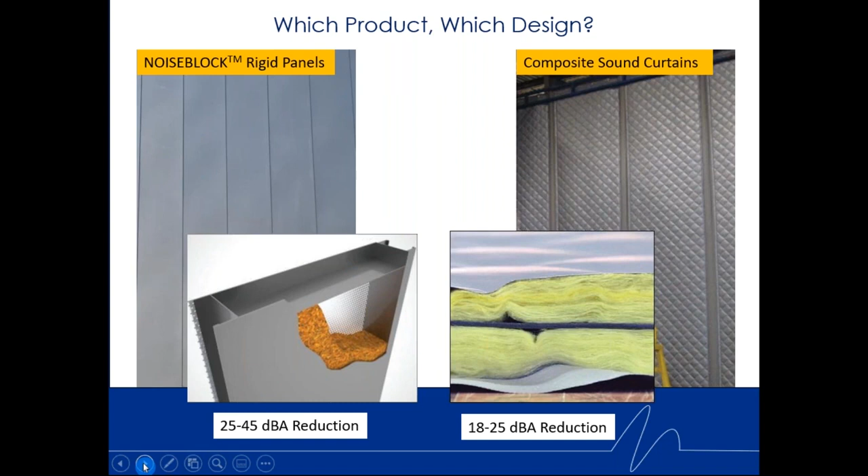And if you need a little less, 18 to 25 dBA reduction, you can go with a more cost-effective or lower cost product, still a very durable product, but you don't really need this heavy-duty massive product when you're controlling noise around a piece of equipment, something like that. So composite just means that this acoustic product is going to both absorb as well as block sound all in one product. It doesn't just block sound and it doesn't just absorb sound.

So composite curtains are basically MLV, or limp mass, or mass loaded vinyl, or limp mass barrier, combined with a quilted fiberglass absorber, providing both sound blocking and sound absorption. So this is a cut view before it's actually finished off and sewn as a finished panel, but that's what we're looking for, composite, anything with sound blocking and sound absorption.

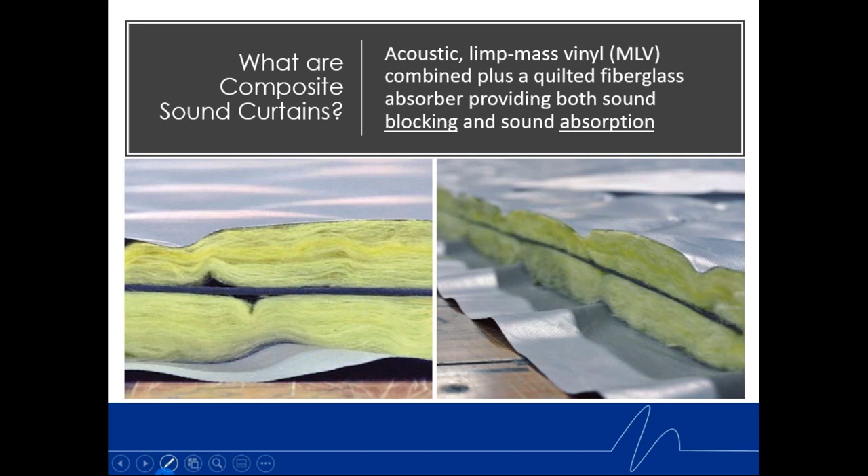In the process of our curtain manufacturing, we have factory cut to length support systems. So we're going to have different ways to support a sound enclosure made of curtains. We have quilting processes to quilt the product, and then we have sewing and factory cut penetration processes. So everything comes already sewn, fit to size, fit to your application for easy install. But that's really all that's involved in the manufacturing process.

If we look at our noise block rigid panels and our composite curtain performance, on the x-axis you have the center frequencies, 63 hertz through 8,000 hertz, and then the transmission loss in decibels, how many decibels per octave band it's going to block within a certain frequency. You can see the top line, sound transmission class value to the right. Sound transmission class value is dimensionless, and basically the higher the number, the better its ability to block sound.

So we can see that the steel panels, the rigid panels, which are about 5.5 pounds per square foot in weight, are quite massive, and they do quite a good job at controlling noise from 63 hertz all the way up to 8,000 hertz. Curtains are at a lower STC, so they don't block noise as well, but for many applications, it's all you need.

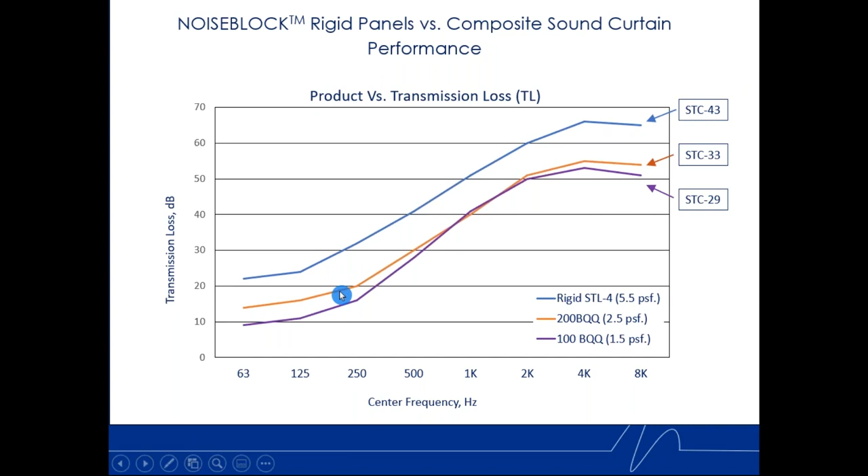That kind of compares the 3 products, rigid product at the top, and then our composite curtains on the next 2 curves. The two most common configurations of this product is what Kinetics would call our BQQ, or barrier sandwiched between two layers of quilt here on the left. So you have your quilted fiberglass, your mass loaded vinyl in the center. Gives you nice absorption on both sides of the product, and in between that, it gives you a massive mass loaded vinyl, which is going to block sound.

We also have a product called our RBQ, which is basically quilt on only one side and then our reinforced barrier on the other. And in this case, since the quilt is only on one side, your absorptive material is on one side, that's the side that would face your noise source, maybe your noisy compressor or something of that nature.

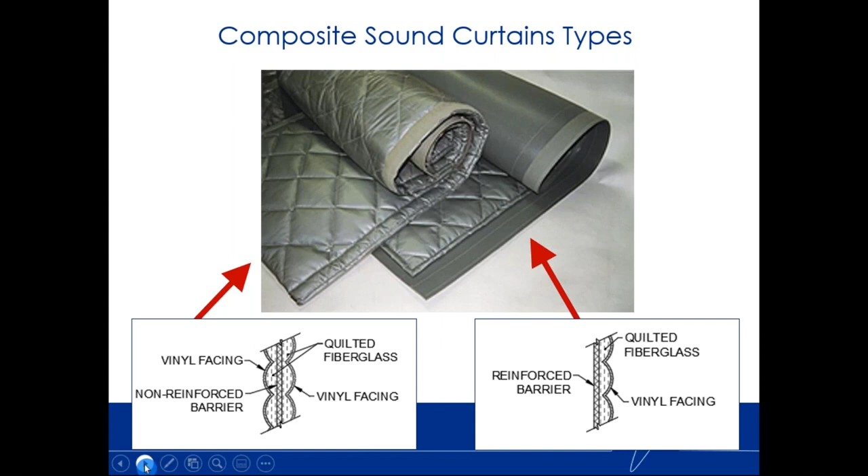Mechanism of performance, we just talked about that, is a composite curtain is going to offer sound absorption, and it's going to offer sound transmission loss or sound blocking. Now for sound absorption, although we use the same density of media, of fiberglass insulation, it comes in different thicknesses, 1, 2, or 4-inch nominal. And the reason I say 4-inch nominal is because it's 4-inch before you sew it, and then it gets compressed a little bit when you sew that. The mass loaded vinyl comes in either a 1 pound per square foot or 2 pound per square foot. So depending on your application, the greater the mass, the better it is to block sound.

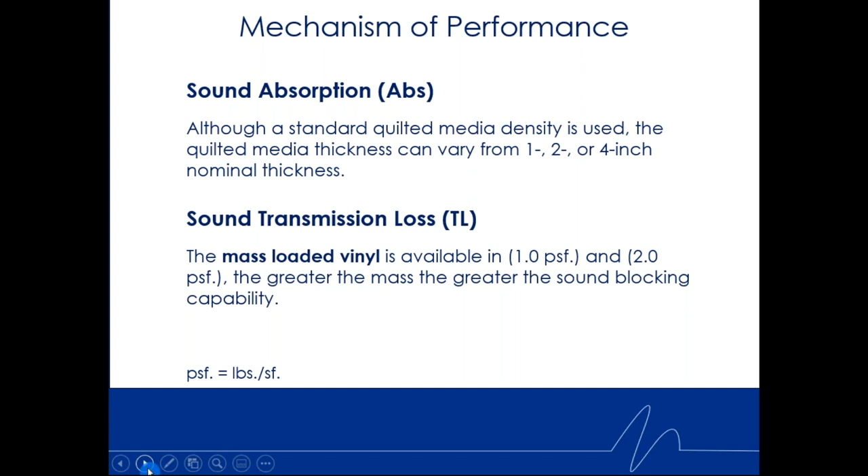All the products that we have for our composite curtains, and many of Kinetics products, are independently tested and backed by those tests. ASTM C423 for sound absorption, and then ASTM E90 for sound blocking. And so we have all that information, those test reports, and they're all done in a NVLAP accredited laboratory.

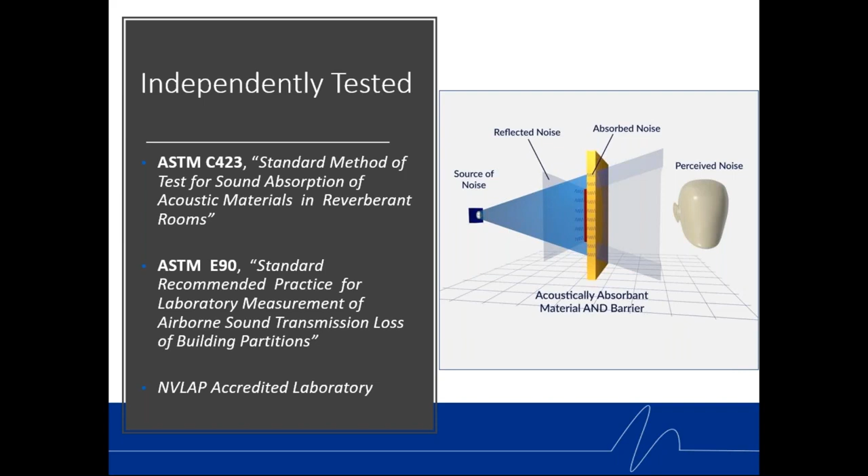There are various constructions of these, as we talked about. We have different thicknesses of quilt, and of course we publish all the NRC and the sound absorption data per frequency. And then also we have different levels of the composite for the transmission loss. So a 50 here you see is a 1/2 pound per square foot mass loaded vinyl. A 100 is a 1 pound per square foot vinyl, and then a 200 is a 2 pound per square foot mass loaded vinyl. And the Qs just mean there's either one layer of Q, or 2 Qs means it's sandwiched. And then we have all the data showing you the STC.

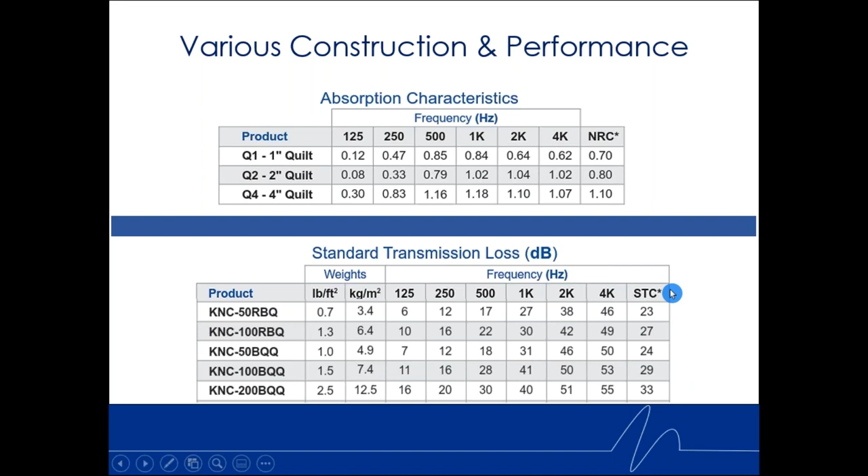So very quickly you can look at this. As an acoustical consultant or engineer, you can actually use the frequency data and determine which one is best for your application, or very quickly to zero in, you can use the STC level. The higher the STC level, the better the blocking capabilities.

Now, when you look at a composite curtain system, and what I mean by that is an enclosure, let's say 4 walls and a roof, they offer typical noise reductions of 18 to 25 dBA. Now, you may say, wow, 18 to 25 dBA, is that a lot? Well, just to let you know, a 10 dBA reduction is going to be perceived as sounding half as loud. So whether it's quiet enough to meet that OSHA standard and OSHA limit, a 10 dBA reduction is going to be what I call an ooh-ah. Wow, that really made a difference.

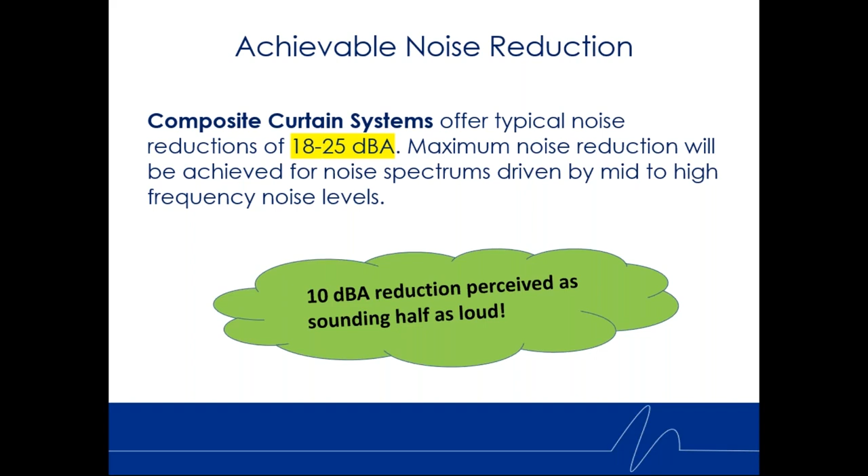All right. And so maximum noise reduction, though, with the composite curtains, what you're going to find out is they work extremely well with noise levels or spectrums that are predominantly 500 hertz and above. So more of the mid to high frequency noise that you may have if your process is producing that, as opposed to the low rumbling, these curtains work very, very well.

Features and benefits: it doesn't matter what your system will look like. The curtains are very forgiving. We can fit them in different contours. We can either close fit them or back them off of multiple walls and roof systems all in one. So they're very, very easy to work with. They're economical over the steel panels.

The steel panels are great because sometimes you need our noise block panels because you need a lot more noise control, maybe 35 dBA, not 25 dBA. Curtains allow for inherent easy maintenance. We'll talk about that as we go. Easy install. You really don't have to hire; if you have your own maintenance team, a lot of times they can put these up themselves.

All the projects have specific submittals, piece marked installation drawings. So everything's just like an erector set, just like a model. It's easy to put together. The product meets Class A fire rating. I think that's one of the most important.

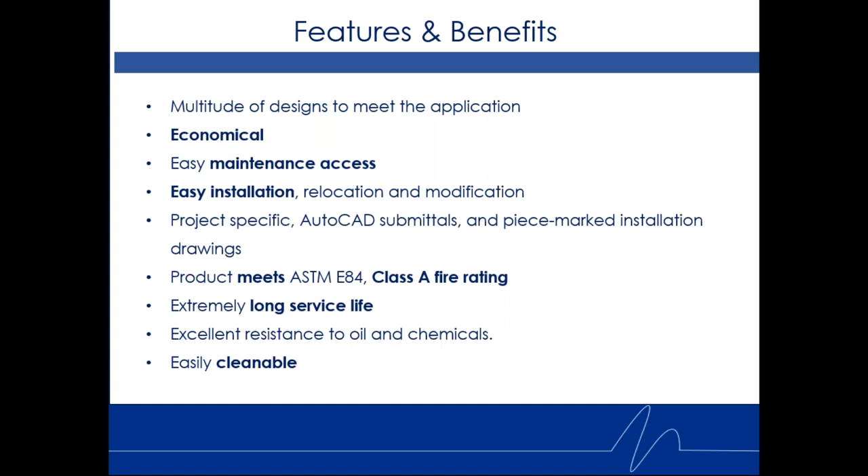So we may use it in a mechanical room of a commercial building. We may use it in a factory. We may use it in a central utility plant, wastewater treatment plant, all these different applications because mainly of the Class A fire rating. Extremely long service life, excellent resistance to chemicals, and easily cleaned. So those are just some benefits and features of the product.

Now, our systems: if you're making an enclosure with one of these around a piece of equipment or process, you can have different types of support systems. All the support systems that you're going to see over the next couple of slides are all bolt together. Everything's cut to size, very easy to install. So this one is a floor mounted frame system.

You're going to have some columns, you're going to have an overhead track, track mounts to the columns in these different corner and splice pieces. And then there's always trolleys. The curtains you're going to see are going to hang from these trolleys from factory installed grommets in the curtain panel.

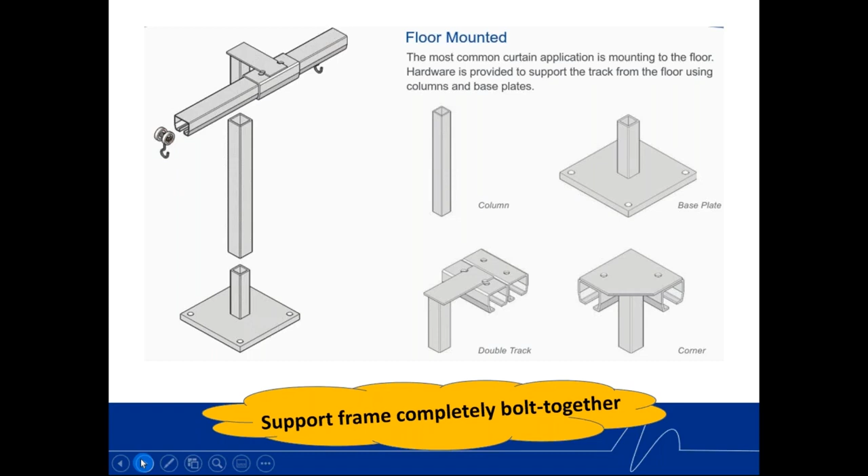Now, let's say you don't want columns, for either housekeeping or maybe they're trip hazards, or it just isn't the way you want to go. We can look at ceiling suspended track. So we don't have to use columns. We can use ceiling suspended track, hooking in some threaded rod, adjusting the level either flush with the ceiling or suspending it below the ceiling.

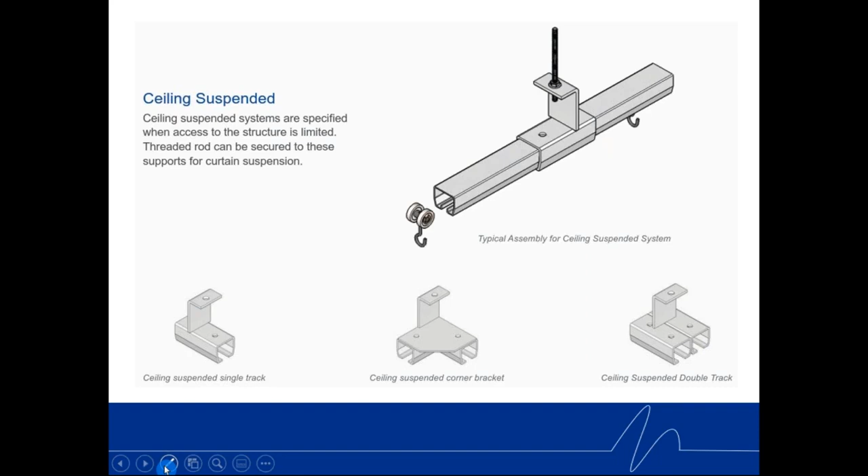We also do heavy duty. You're going to see an example as we go through of a system that's 16 feet tall, and Kinetics had to design and can design very robust support systems. Maybe instead of 1x1 or 2x2 tube steel columns, they're using 4x4 HSS steel and some heavy duty, might be 16, 20 foot tall.

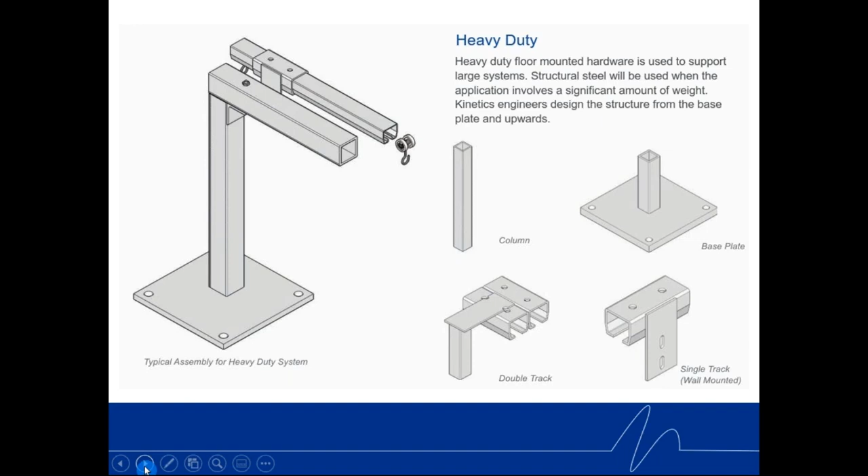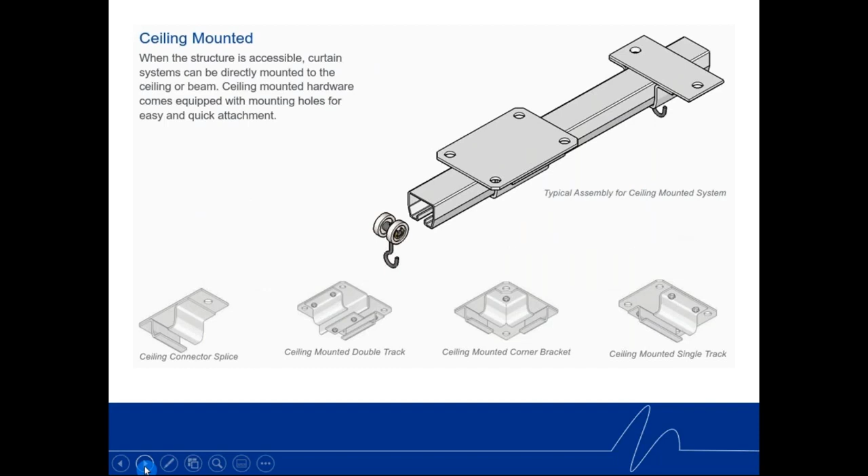And the nice thing at Kinetics, since we have our own structural team on staff, they can go ahead and design that for us. You can also wall mount our systems, and you can also ceiling mount overhead. So there's a lot of applications. If you don't want the columns for an enclosure or a couple of walls, whether it has a roof or not, you can mount it in all these different fashions.

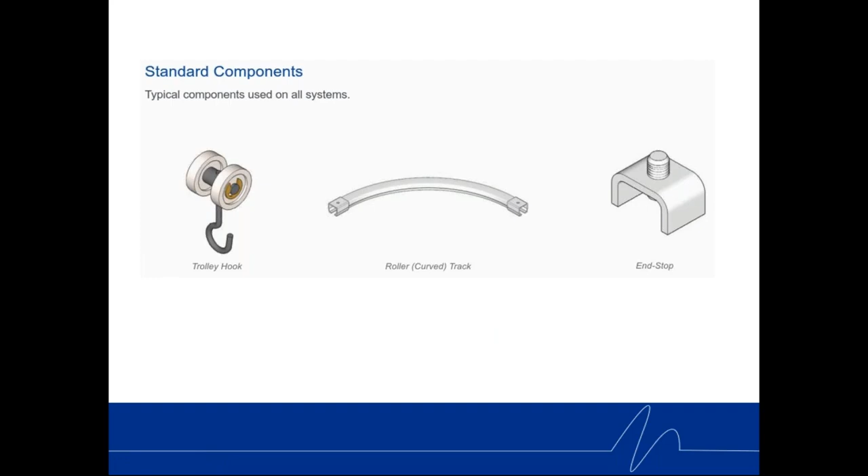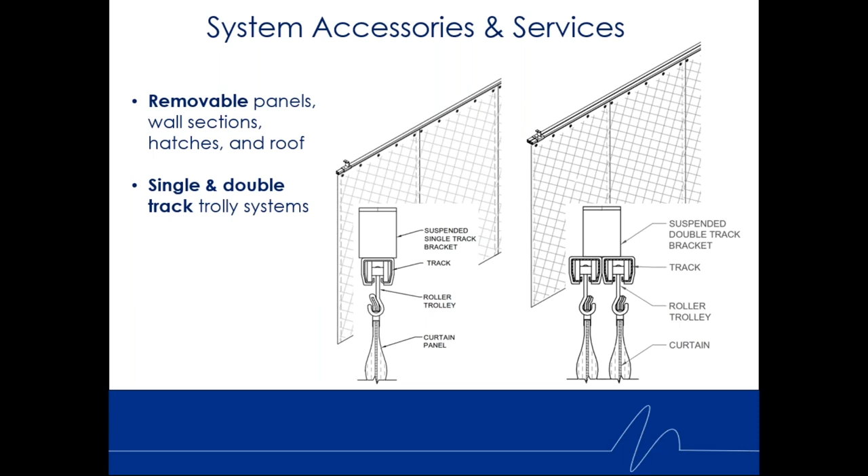So that's inherently easy to access. Also in these systems, when you start to enclose something, whether it was a rigid enclosure or these composite curtains, you still have to take into account some basic issues, lighting, access. You also have to look at the heat buildup within the enclosure.

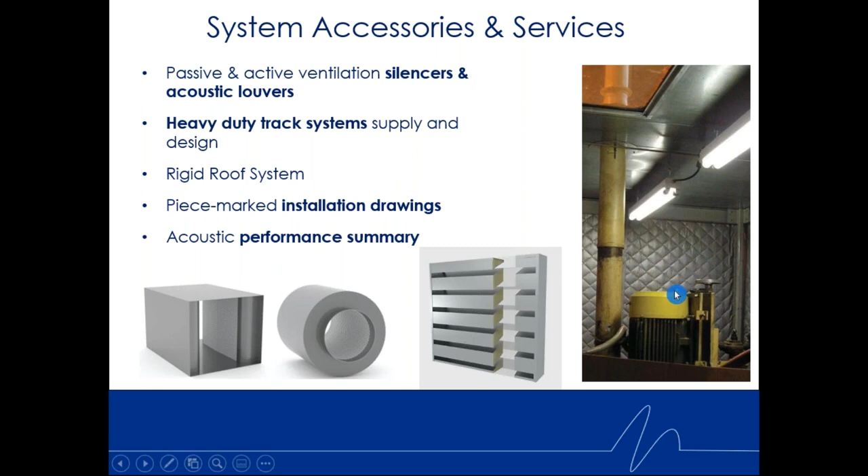You want to make sure it vents properly, whether you're going to need forced ventilation like a fan, an exhaust fan, or whether you can use passive ventilation. And so either way, Kinetics applies our silencers, acoustic louvers, and things like that to help in those cases. This one is really interesting because you actually have a rigid noise block roof on a curtain system, which makes it easy to hang internal lights and things like that.

Now, what I always believe in is a picture's worth 1,000 words. So our goal here in the next few slides is you may see something that's very applicable to an application or an interest you may have. So in this one, it's a curtain wall. We have a simple curtain wall here. There's actually a curtain in the background that you can't see that runs to the right. And it's making a little mechanical space. There's pumps and fans in here.

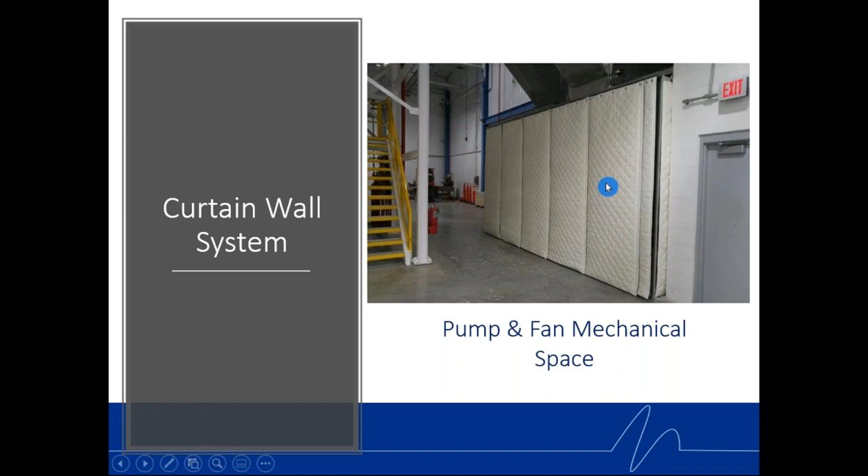And an interesting thing at this facility is you walk in this door and you go up these steps, and out of the blue, the pumps or the fan kicks on, and it kind of startles you. It's kind of unsafe, especially when you're getting on these stairs. So we make a mechanical room. This happens to be actually a 2 pound per square foot mass loaded vinyl sandwiched between 2 layers of quilt. So, you know, something very basic, very forgiving.

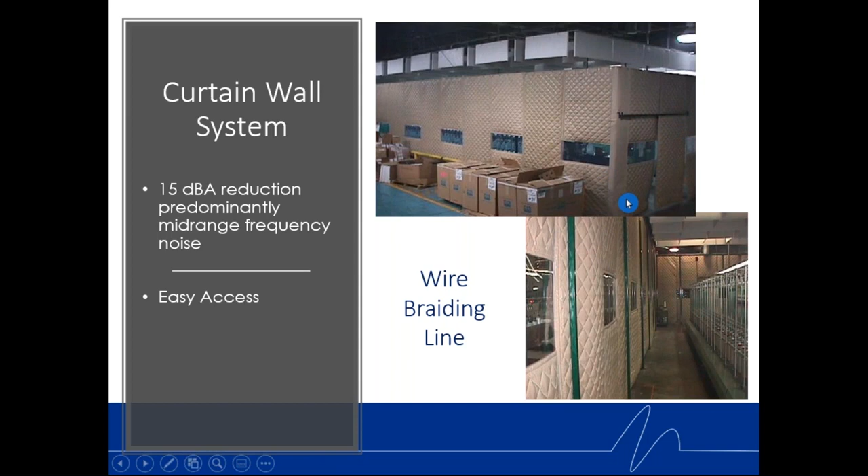Here's a system which is a wire braiding system, and it kind of shows you the inside and out. Well, they didn't want to enclose the top, so the system consists of 4 walls, viewports sewn in at the factory, double sliding access doors made of curtains, and then for the noise up and over at the top, we're actually using some of Kinetics KB803 baffles to control that flanking noise. So once again, another system, a lot of ways you can use a lot of standard product as applied to a non-standard application.

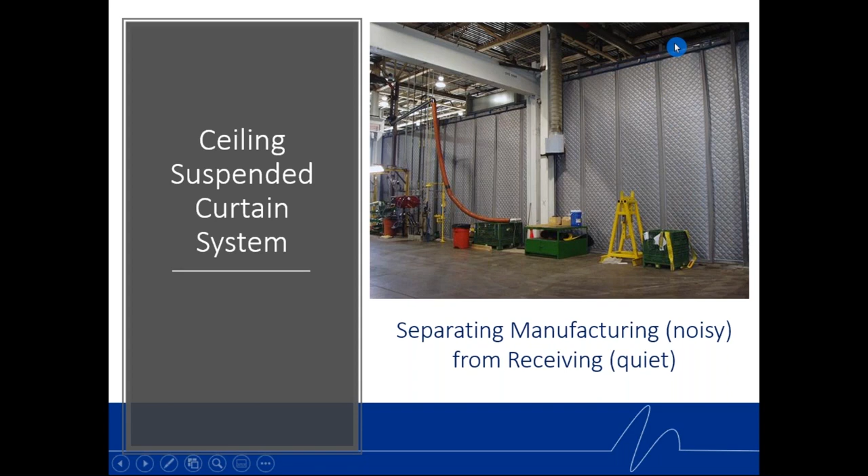This is another one separating two parts of a facility. In the background behind this wall is a very noisy area for manufacturing. A lot of it was in the 500 hertz band and above, but the left side here, the side we're on, was actually receiving a slightly quieter area. And so they were able to, with no columns, do a ceiling suspended system. And I think this was roughly 20 foot tall here on the tallest part to the right.

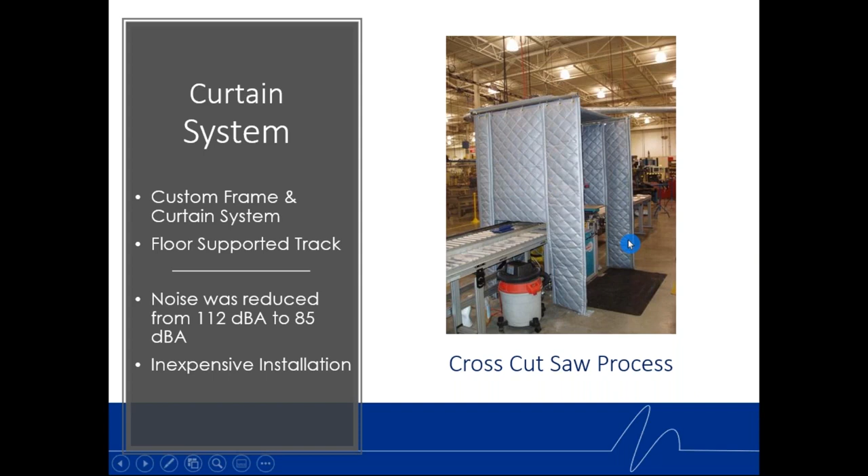Systems don't have to be very difficult either. This is a simple floor supported track system. They were at 112 dBA. It was a cross-cut saw cutting aluminum extrusions, and you know how loud that is, mostly mid to high frequency noise. So this was able to take it from 112 down to 85 dBA in the background of this photo. The only person that needed to wear hearing protection was the operator.

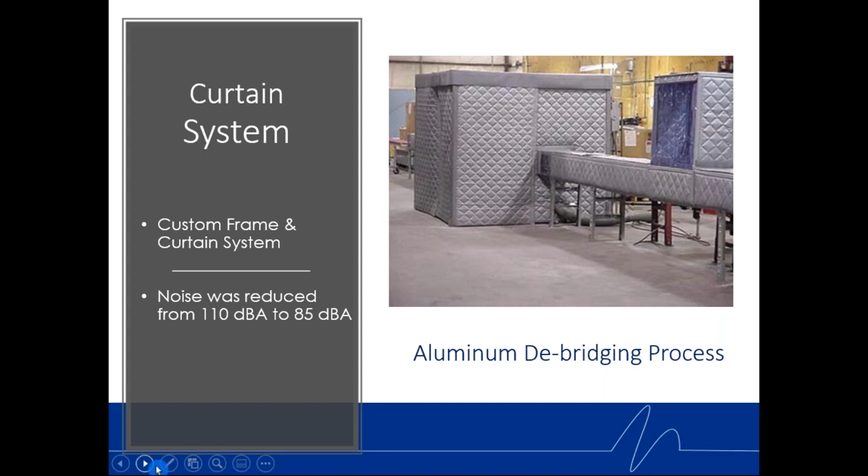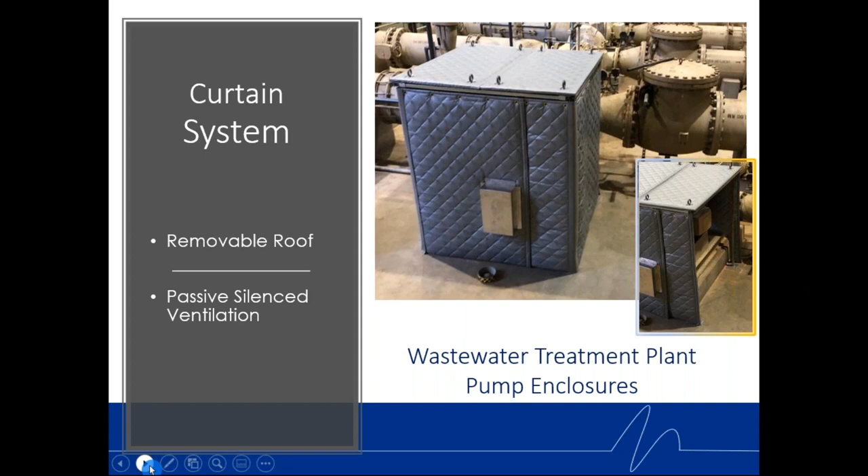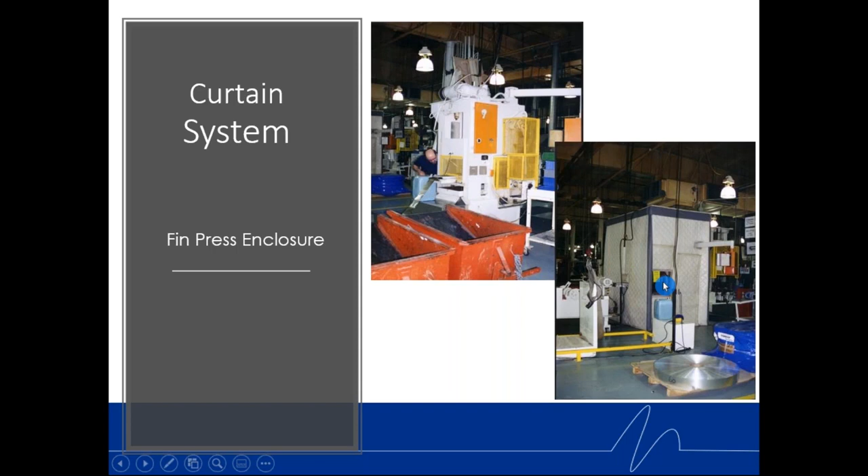Now, sometimes we actually have a client that may want to custom fit. So this is a fin press enclosure for heat exchanger fins, and they wanted to custom fit the enclosure, which I always like to kind of stand back from the enclosure a little bit to be the most cost effective. But this one was custom fit, and they had a number of these, and they actually worked out quite well with access and noise control.

So that's the nice thing with curtains, is they're very forgiving. It's easy to fit up. If you need to cut something, maybe there was something you couldn't line up to really make it in the shop, but you needed to field cut it, very easy to field cut and very easy to seal off.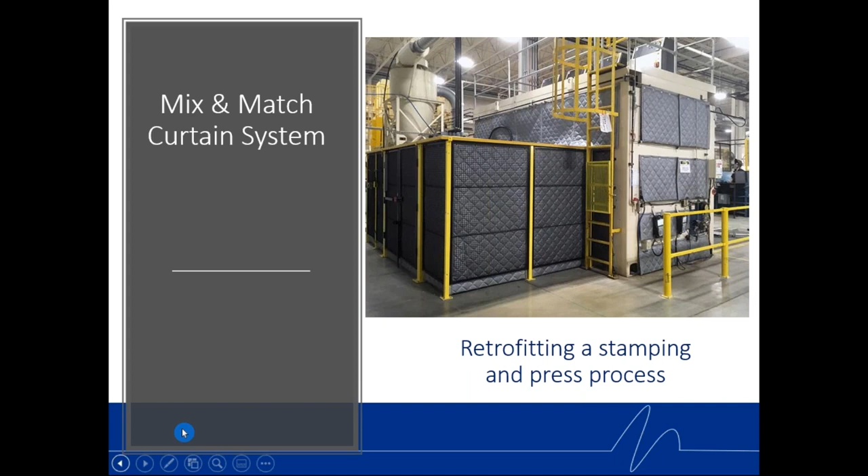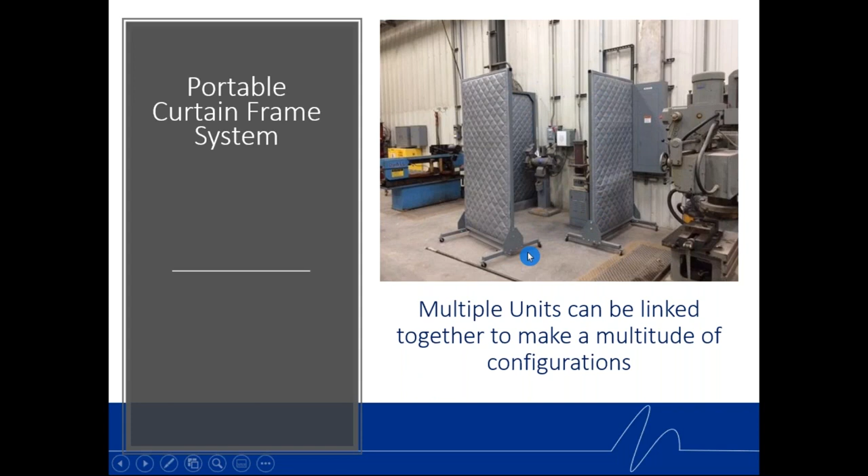Now, another one is multiple. You can have multiple of these portable curtain frames. Now you can get a half dozen or a dozen of these, and actually as they get closer to each other, you can use a mass loaded vinyl to cover this corner and connect each. So you can make this in many different shapes where they come completely together and then close off with Velcro on this arm and this vertical arm, and then a mass loaded vinyl. So it's a really neat system. That was a picture I had of some that were actually just in storage. They weren't actually using them for that grinding process there.